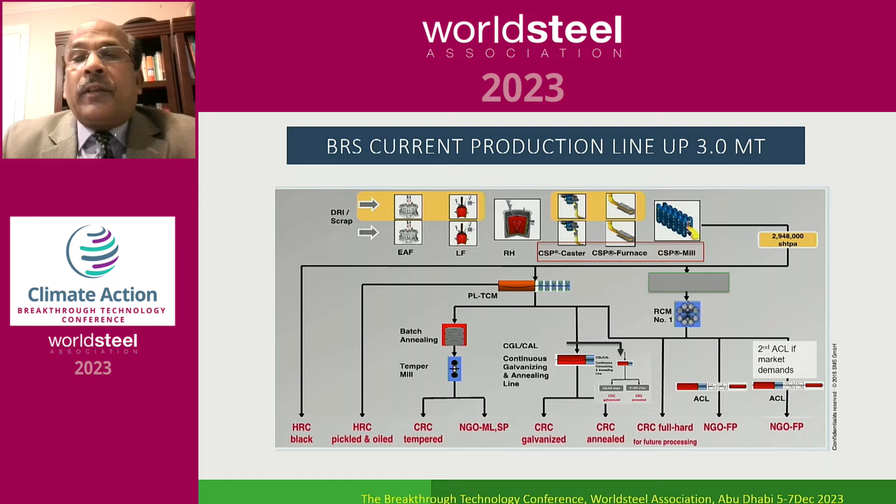The current Big River Steel production lineup is 3 million ton. The feature is that it's a mini CSP mill. It has two arc furnaces and also an LMF, combined with an RH degasser. The production lineup is a CSP mill with associated finishing lines. One interesting feature of this current production lineup is the addition of an NGO line.

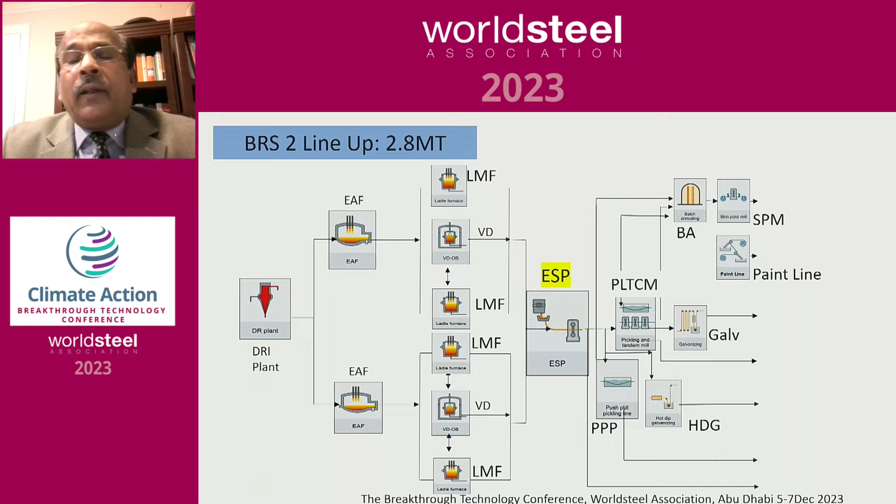Just by our neighboring site, we are having a second mill coming up, called BRS2, with a 2.8 million ton capacity, and it also has two electric arc furnaces for steel making purposes. The unique feature of this new plant is it runs with ESP technology, like the Arvedi Endless Strip Production technology, and comes with several newer finishing lines.

So in total, it will be almost 6 million ton capacity, but all of this 6 million ton capacity of steel making will be through only EAF, electric arc furnace steel making. Some of you who attended last time at the June TECO meeting in Ghent saw a reference presentation comparing the integrated route of crude steel making versus 100% scrap steel making. If you look at the CO2 emissions, it's almost 1876 kg of CO2 emission for crude steel through the integrated route versus 330 kg of CO2 emission through scrap-based steel making, so almost 1/6 of what is usually emitted through integrated steel making.

So we are already at 1/6 of CO2 emission compared with other integrated steel making routes. Our process at Big River Steel, we calculated this year, is about 410 kg of CO2 emission per ton of hot metal.

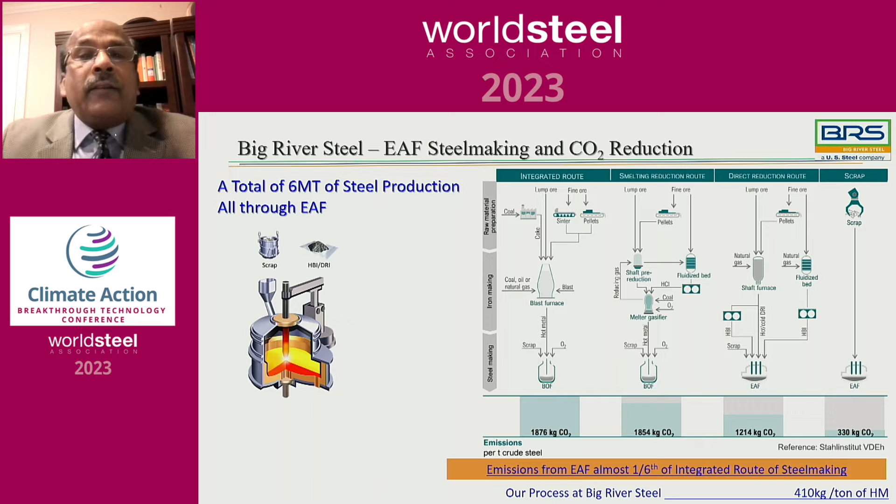So just a few things about the arc furnace steel making at BRS, some features to save energy and also make quality steel production. BRS uses a DC furnace technology that reduces flickers and high power input rates.

We also practice a foamy slag practice. With this practice, the arc is shielded, therefore we conserve the heat, and also it saves the refractory life or minimizes the erosion of the refractory because the heat is shielded or insulated by the slag. And since the arc is shielded by the slag, the nitrogen intake in the steel is also low.

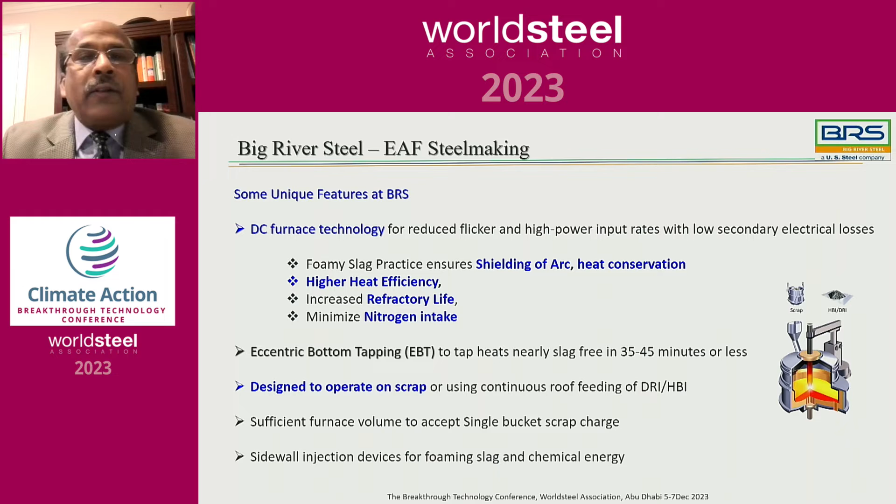There are other good features about the furnace: it has sufficient volume to accept the full single bucket charge, and also it has an eccentric bottom tapping feature.

Typical charge mix is scrap, pig iron, and HBI, and our charge mix calculation is based purely on the copper. Copper is the main driving force for what kind of charge mix we'll be using. We have a low copper charge mix, and also we have a high copper charge mix.

And CSPs, as we all know, have too many recipes, and the challenge is that with too many recipes, there are many order books and grades, so one challenge is switching back and forth between different grades. But also the opportunity is that being a CSP, we can make different grades, and we can switch between the grades easily. That's a good advantage for the CSP.

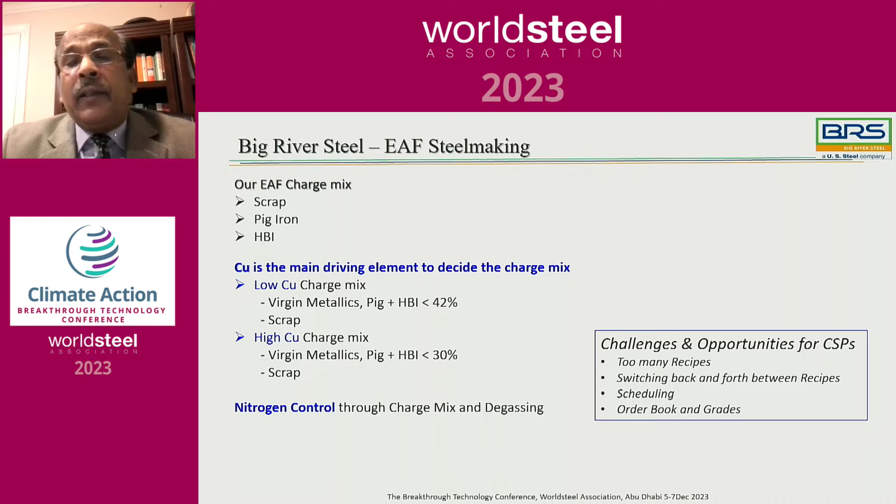And nitrogen control, wherever it is needed, we also manage through the charge mix calculation. And also, if very low amounts of nitrogen are needed, we take it to the degasser.

If we see the complete production lineup in Big River Steel, it's a CSP steel production. So after the crude steel is made, it goes to the LMF, and from the casting to the hot band coiling, you can see it's a continuous process. There is no loss of heat in cooling down the slab or reheating back to the soaking temperature. So the slab to prime coil yield is almost 99% here. The production is very continuous.

Because of this continuous nature of processing, immense technological opportunities exist, because it's a thin slab caster with low soaking temperature and very little residence time inside the furnace. That gives us, as a product metallurgist, the ability to lean down the chemistry. The benefit is that CSPs can cast difficult-to-cast advanced high strength steels, which otherwise in the integrated way of making, one has to cool down very slowly and also practice reheating back to the soaking temperature. That kind of step is avoided in continuous CSP steel making.

So there are many opportunities to make technological breakthroughs in developing newer products that ask for lesser energy consumption. I want to talk about one such breakthrough that we have done at Big River Steel.

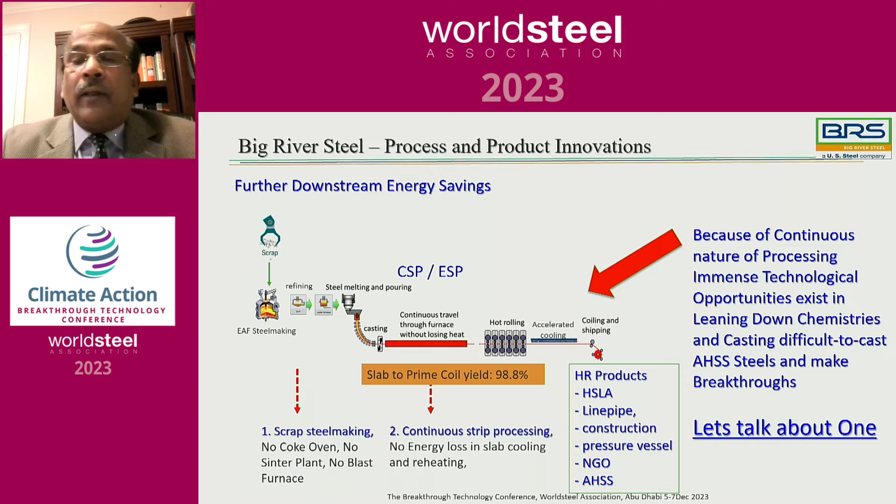The world is increasingly concerned about reducing CO2 emissions, so they are looking for greener steel. The current perspective in auto steel demand is that they are looking for higher strength steel, and they also need high formability, specifically with regard to edge stretchability. And they are also looking for greener steel, that is, low carbon steel making.

If we consider a typical passenger vehicle, 54% of the lightweighting of a vehicle is through the use of steels with tensile strength of 450 MPa and higher. Out of that 54%, 25% is steel with tensile strength up to 800 MPa. These steels are catered to by the introduction of HSLA, dual phase steels, and multi-phase steels. We also sometimes call them complex phase steels, and ferritic bainitic steel for higher edge stretchability.

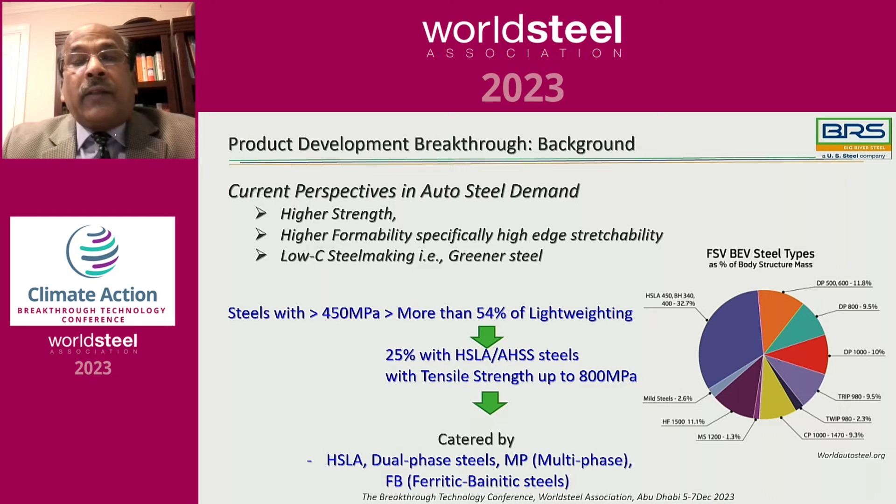If we look at these dual phase, ferritic bainitic, or complex phase steels, in order to guarantee these microstructures, these steels are highly alloyed, and also the cost of production is very high. To generate this second phase microstructure for strength and formability, complicated downstream finishing lines are needed to produce this microstructure.

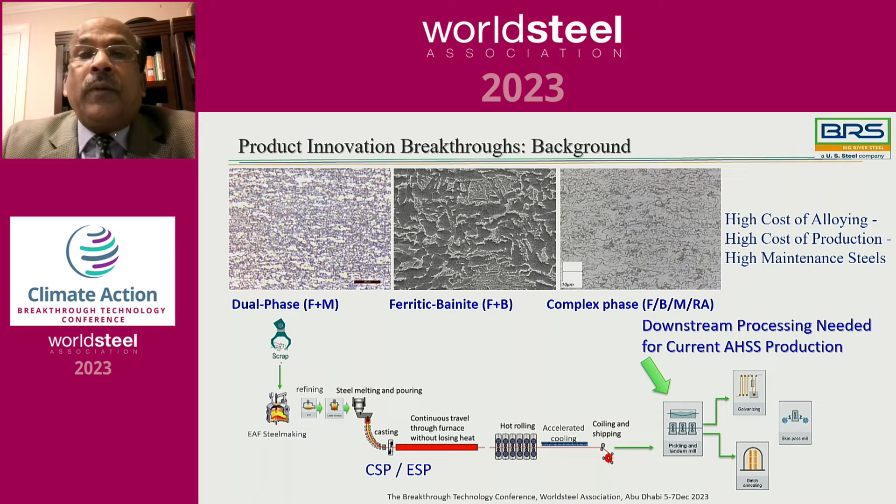So the thought process was: how about taking out the second phase particles and making a single phase ferritic microstructure, and getting rid of the whole secondary processing lineup? That's what we are talking about here.

At Big River Steel, we have developed a very lean, low carbon, and completely ferritic steel, strengthened by nanoprecipitates of microalloyed carbides, coming with a tensile strength of 780 MPa and outstanding hole expansion ratio. The microstructure is totally ferritic, 100% ferritic, and the strength is derived by titanium carbide nanoprecipitates that are about 3 to 4 nanometers in size within the grain. This microstructure is single phase, with no centerline segregation, no banded microstructure, and no second phase hard constituents, which gives very outstanding edge stretchability or hole expansion ratio. Because it has very low carbon, it has the least carbon equivalence for enhanced weldability. The chemistry is just carbon manganese, with only titanium added to get that nanoprecipitates of titanium carbide.

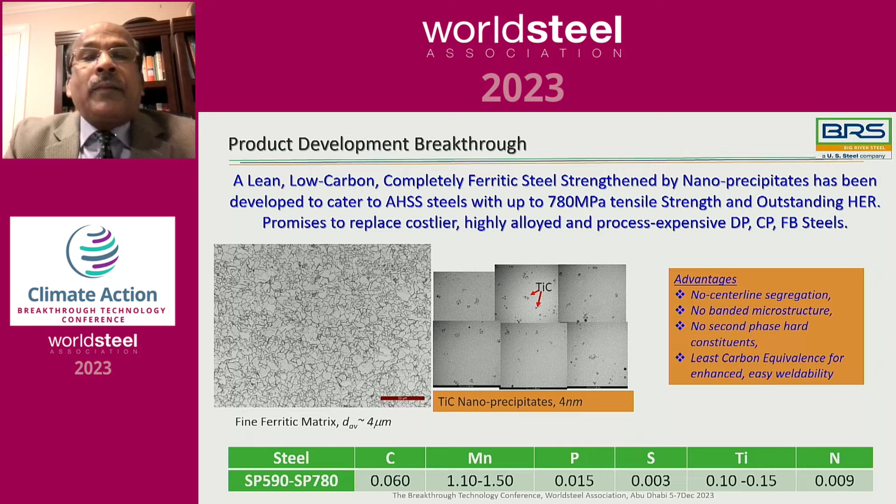The interesting thing is that this whole microstructure is developed only in the hot band coiling stage. We don't need any secondary processing for that. The whole strength is obtained in the hot band coils through just controlling the hot rolling parameters and adapting to that simple chemistry. We call it single phase nanoprecipitate strengthened steel. No downstream processing is needed to get that strength or formability in this steel, which causes huge savings in energy, process elimination, lead time reduced, and everything else.

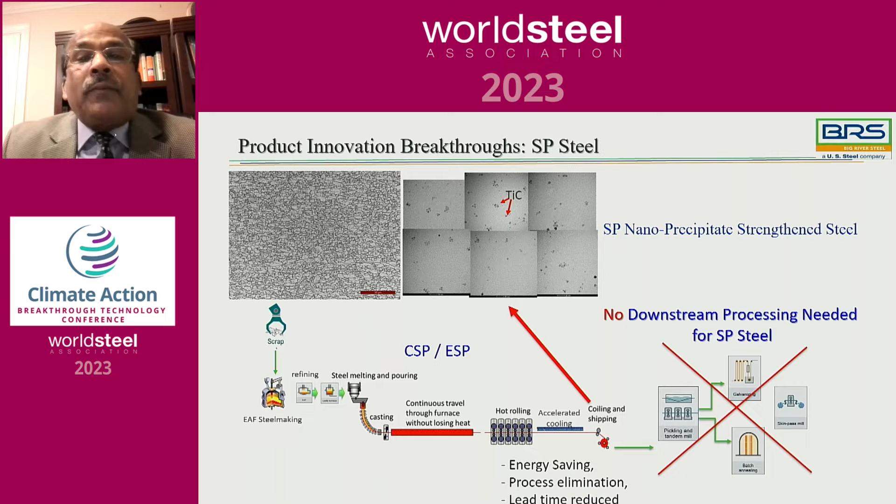This nanoprecipitate strengthened steel is obtained in the hot band coil with a tensile strength of 780 MPa. But if somebody wants it in the coated condition, this hot band coil can also be taken through a galv line through a very low temperature heat to coat annealing cycle that can coat the steel without affecting any mechanical properties or formability properties.

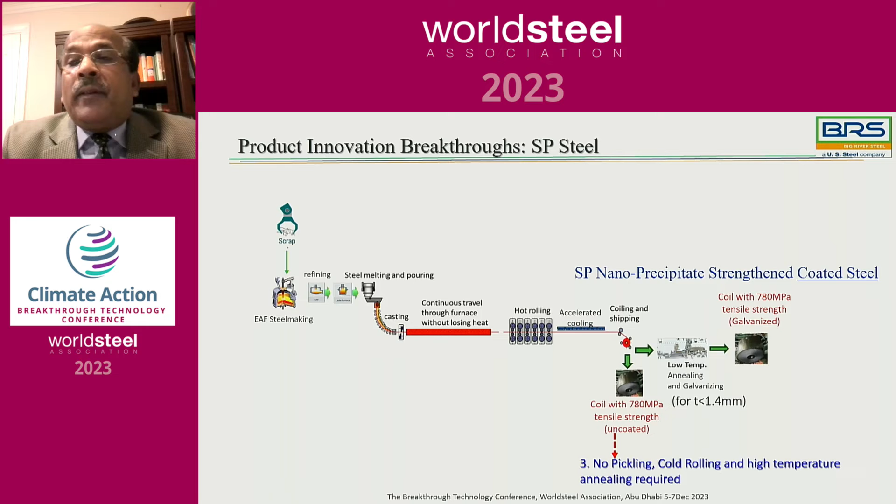These plots show on the left hand side the yield strength as a function of effective titanium content, keeping carbon, manganese, and all other elements the same. Just by varying the total titanium content in the steel, various steels with various tensile strength levels can be made, like HSLA 70, HSLA 80, HSLA 100. This steel can be made by just varying the total titanium content.

On the right hand side, it shows at different strength levels what hole expansion ratio is obtained in this steel, also compared with similar strength dual phase steel. Across the whole spectrum of tensile strength levels, you can see the outstanding hole expansion ratio obtained in these steels, exceeding that manifested by DP590 or DP780 steel. So this SP780 steel is a proper, apt substitute that will be happening for DP780 steel.

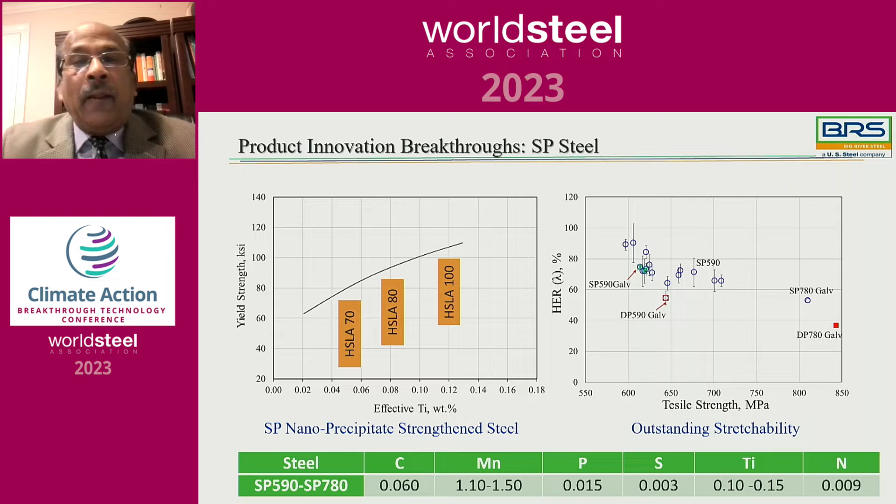This is not only theoretical or laboratory development of steel, it is now commercially being made at Big River Steel. On the left-hand side, you can see that ultra-high strength, like UHSS 100 steel in the gauge range of 4.5 to 10 millimeters, is commercially used by many OEMs for structural machinery applications, excavators and other crane booms, etc.

On the automotive front, a few OEMs are using this for components like car seat retractor, car seat, and front link. The usage is being developed and increasing day by day as OEMs specifically try to explore how they can use this HSLA 100 steel for various automotive applications. These steels are being commercially produced at Big River Steel in a big way now.

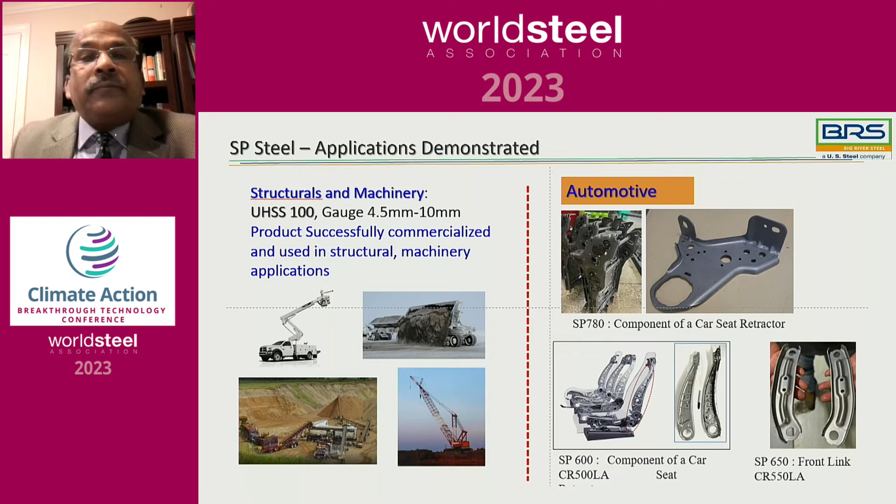In summary, this technological breakthrough in product and processing has been achieved in designing a chemistry and process for a very lean, very low carbon nanoprecipitation strengthened single phase ferritic steel that can yield up to a tensile strength of 780 MPa in both hot roll and coated condition, and can also be achieved in fully processed and coated conditions. The steel can be offered in various applicable gauges in hot roll and coated condition, and it eliminates the need for any downstream processing.

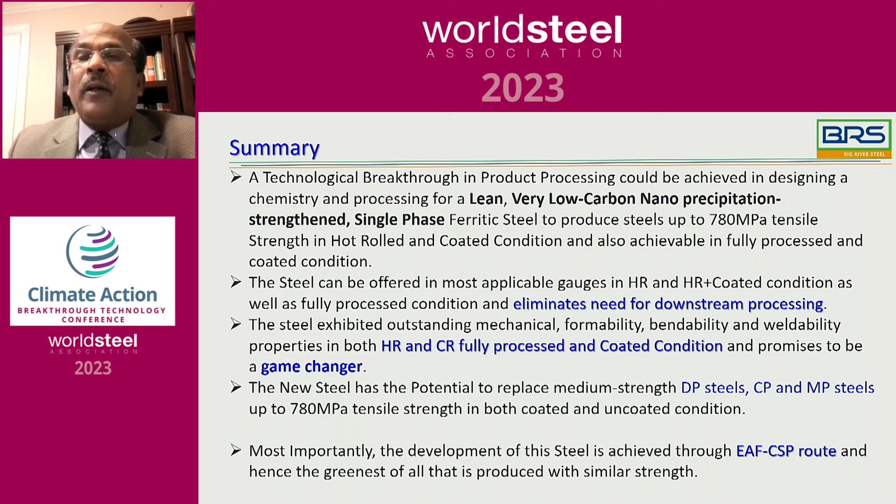The new steel has the potential to replace medium strength DP steel, CP steels and MP steels up to a strength level of 780 MPa in tensile strength, both in coated and uncoated conditions. Most importantly, the development of this steel is made through the EAF and CSP route, making it the greenest of all steels produced with similar strength and formability properties.

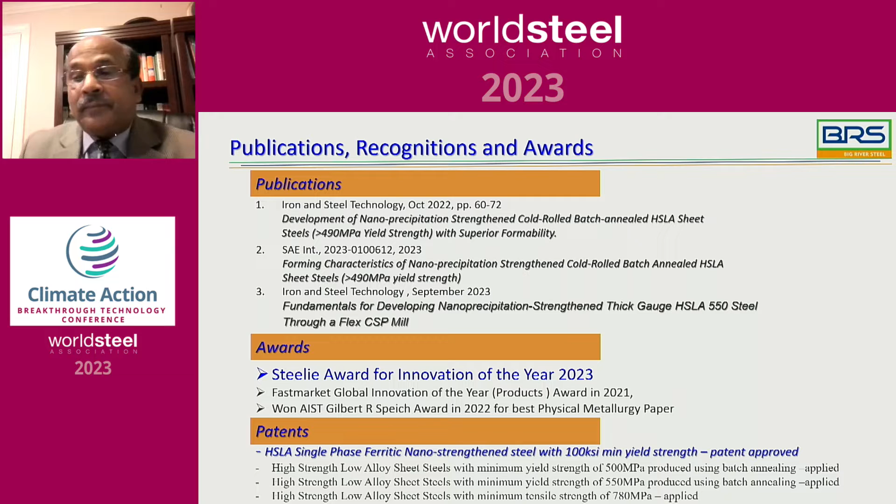Here are some of the publications and recognitions and awards that have been cited; you can find these in the presentation later on. This year, the breakthrough has been awarded the Steelie Award for Innovation of the Year 2023. We are very thankful to the jury members of the World Steel Association for honoring us with this great award. Some patents have been filed for this product, and some have already been approved. With that, I'll ask the audience if they have any questions or comments. Thank you.

Thank you, Amar, for a very impressive presentation and a great innovation, I think.

Maybe a question from me to begin with. Was the development of this product entirely within Big River Steel, or did you partner with academics or any external parties? No, it was totally within Big River Steel itself.

Thank you, Dr. De, for your presentation. My question is, what are the key metallurgical parameters that you have to control in order to keep those titanium precipitates so small? Okay, yeah, thank you. That's a great question.

The processing of this steel is very straightforward. In the hot rolling condition, you just have to control the finishing temperature and the coiling temperature. The finishing temperature has to be in a range of about 1550 to 1670 Fahrenheit, so that you don't grow the titanium carbide precipitates during the finishing deformation stage. What you have to control is cooling down very fast from this finishing temperature to the coiling temperature stage, so that most of the titanium remains in solution, but the precipitates form only in the hot band coil, so precipitation occurs during the coiling stage and remains very fine, so you don't overgrow the precipitates.

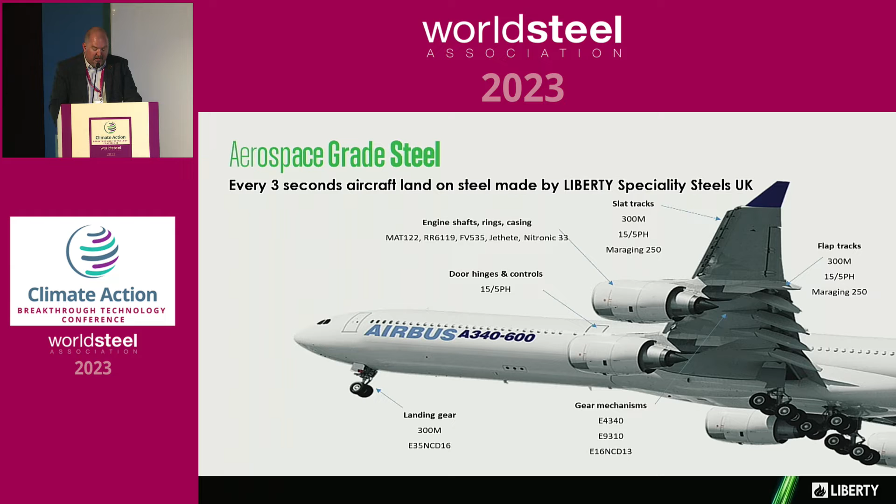Our process route for aerospace steel manufacture uses both merchant and own-arising scraps, melted by a 165-ton electric arc furnace, refined in the ladle arc before being teamed into ingots. Electric arc furnaces are capable of producing a wide range of steel grades with a low carbon footprint. This includes the steel for safety-critical aerospace applications.

Green steel into the aerospace market will ultimately include electrical energy, alternative carbon and gas, all from renewable sources. Our journey so far, from our original carbon footprint analysis on the left-hand side of the chart, includes the implementation of ECOPE 100, work on electrification, and then the efficiency improvements for both electrical and gas consumption. The Liberty Speciality Steel CN30 strategy targets at least a 70% reduction in carbon emissions, but with the possibility of purchasing green gas, a 95% reduction may be possible, minimising the amount of carbon offsetting required to be truly carbon neutral.

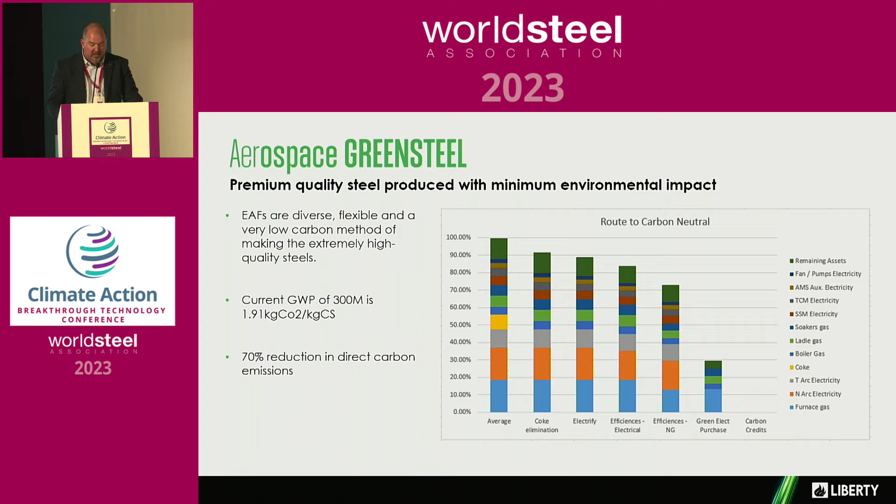Aerospace grades present many analytical challenges. There are elements that we can control in process, like phosphorus and sulphur, and those which we cannot control, like copper and tin, where dilution of elements will be required. The scrap used to dilute residual elements is referred to as low residual scrap, and tends to come from the automotive production process in the UK. The availability of low residual scraps can be directly affected by a number of factors, such as reduced automotive manufacturing output in the short term and the forecasted gradual increase in embedded tramp elements.

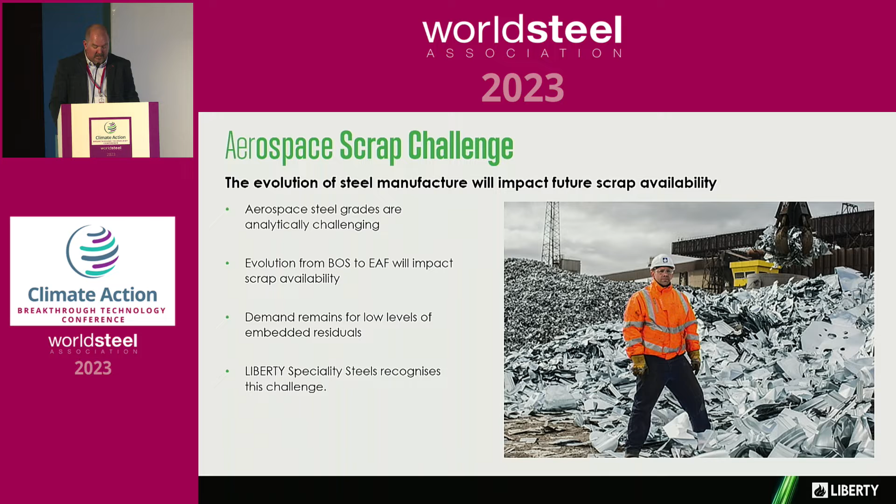As consumers of scrap, Liberty Speciality Steels recognise these challenges and have a strategy to reduce dependence on low residual scraps currently available in the UK market.

Aerospace steels, especially those destined for safety critical components, require a range of mechanical properties and other important characteristics. For example, the 300M grade used for landing gear requires high strength and excellent fatigue performance, while being easy to machine. Although our downstream processes contribute to the development of these characteristics, good analytical control is critical to ensure these downstream processes are effective in achieving the customer's requirements. Our first step in analytical control is scrap selection, something we affectionately refer to as cold steelmaking.

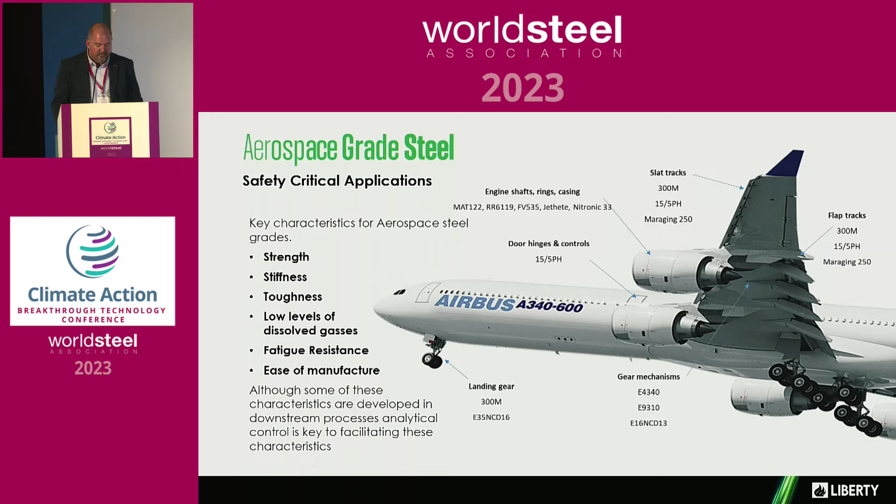This is our view of the UK scrap market, and around 75% of the scrap available is classified as basic. I've also highlighted the combined maximum expected copper and tin contents. It's also important to recognise that only around 10% of the scrap available in the UK can be classified as low residual. But it's important to remember that this material is affected by automotive manufacturing output, and that 10% is, in our view, the historical best volume available.

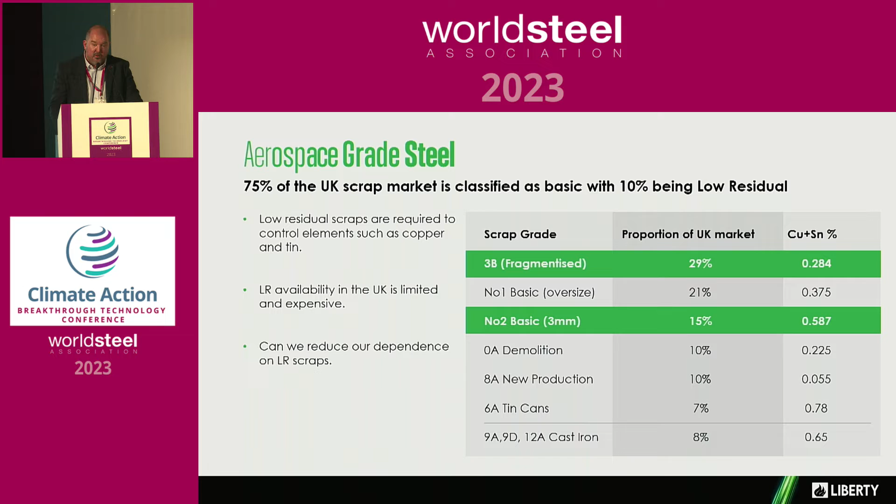Scrap processing, sometimes referred to as scrap cleaning, can reduce the copper and tin content of basic scraps, as some of the copper is not embedded and is present only as components linked to the steel's previous use. These processes can vary in complexity, but all of them essentially liberate non-ferrous metals, leaving electric arc furnace operators with a cleaner, higher yielding scrap that is as low in tramp elements as possible. The more complex the process, the more non-ferrous material is liberated, and this has a twofold improvement: firstly, the clean scrap can be used across more steel grades, and secondly, the embedded copper and tin levels are not increased.

Highlighted on this slide is the range of analysis across 98 live aerospace grades currently on offer from Liberty Speciality Steels. Alongside challenging levels of phosphorus and sulphur at the lowest end of the range, you will also recognise the 0.5% variability in copper plus tin across the whole range of grades. Low residual scraps, required to dilute the residuals from other scraps, are required in volume at the extreme low end of this range, with the most extreme example requiring up to 50% of the charge weight to be low residual scrap.

With scrap cleaning, it is possible to reduce the overall requirement for low residual scraps. For cast final analysis aims in the middle of this product range, and it's even possible to eliminate its requirement in full for analysis aims at the upper end of this range.

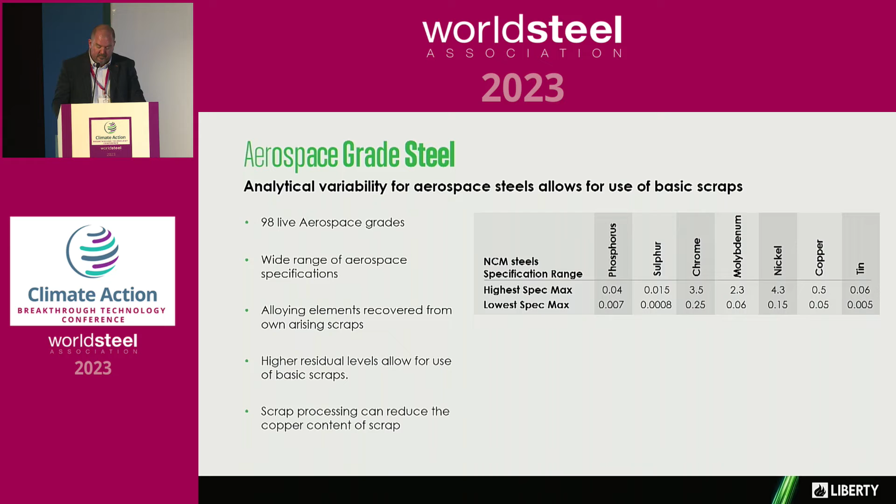Processes already used at Speciality Steels have achieved a reduction in copper and tin of 0.1%, from just under 0.3% to just less than 0.2%. This process involved further processing of fragmented scrap, liberating up to a further 4% of non-ferrous materials by weight.

The non-ferrous materials recovered can also be further segregated and sold to generate alternate revenue streams. Importantly, steriles are also segregated, meaning that they do not emit carbon during the steel melting process. They can also be recycled, leaving us as steelmakers with a zero waste process.

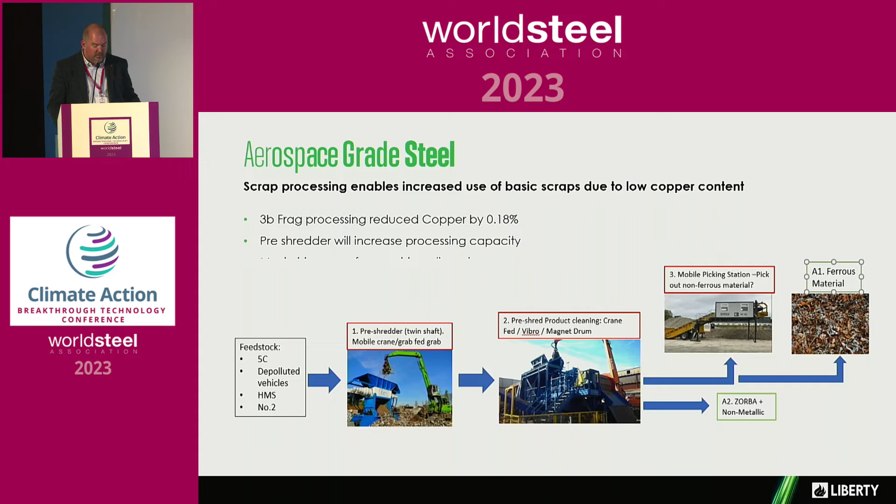In summary, even though aerospace steel grades have challenging attributes, mitigations are available to reduce our dependence on inherently low residual steel scraps while reducing Scope 1, 2 and 3 emissions. These processes can also help to slow down, and possibly even eliminate, the increase of embedded residuals in recycled scrap, a problem many electric arc furnace operators are concerned about.

I hope that I've highlighted the capability of electric furnaces to manufacture extremely high quality steel grades with a low carbon footprint. Thanks, and I hope you all enjoy your flight home.

Thanks, Scott. Great presentation. Thank you.

I think we've all heard the message from outside that to make really high quality steels, you need ores, you need blast furnaces. That's it. I think the last two presentations have shown us that, yeah, you have to work at it. You have to really control your inputs, but there's nothing that we can't do if we really put our minds to it. So, encouraging for the future.

Thank you. Do we have any questions for Ed? For Scott, sorry. I don't see any hands up.

Maybe I'll ask one. If you look at those grades, Scott, what proportion scrap would you have going into the grades that you're talking about? So all our aerospace grades are 100% scrap. 100%? We don't use any hot metal or iron.